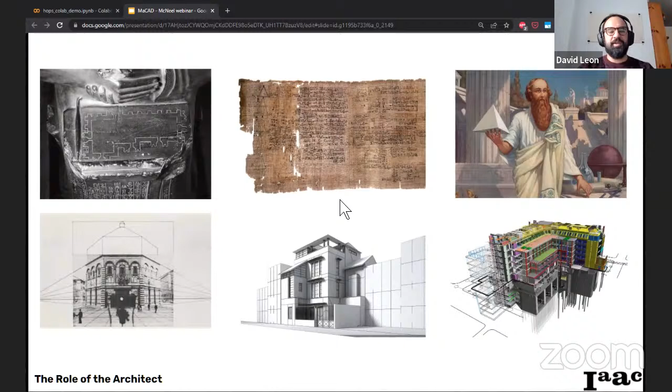This process has become ever more complex since we started building in the first place, and it's tightly related to the tools we've had at hand since the beginning—first with hand drafting, then the incorporation of technical tools to gain more precision in our drawings, to communicate those drawings faster, perhaps establishing certain conventions that architects now sometimes take for granted.

And finally, through the inevitable incorporation of computation in the design process, these tools and facilities have gotten mainstreamed, and it feels from the architectural point of view that it has exploded in many directions, because computation now touches so many aspects of the architectural trade. But setting aside the most common notion of computational design in architecture, which is this picture of complexity in complex forms, transforming our ideas into volumetric complexity.

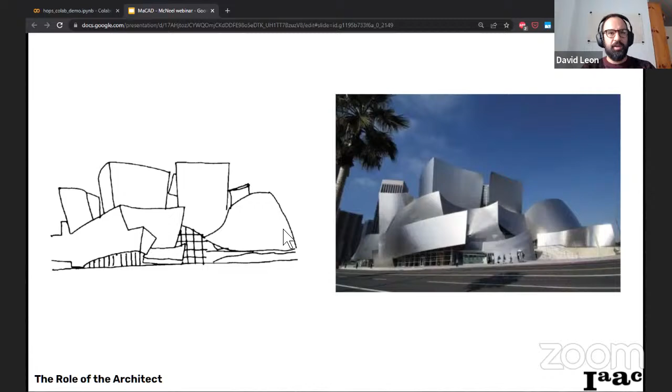I think there lies a more complex, more rich dialogue in the evolution of this process of conveying our ideas between architects, between a team, or between the designer and the final user. Along the lines of time, starting from hand drawing, going through technical drawing, and through the incorporation of computer-aided design by the use of technical drawing on our screens, and more plastic or freeform types of designs, all the way up to what we now call computational design.

What we have gained technically can be described as an enhancement in precision, an enhancement in complexity, or basically allowing us more complexity within our design process. But more than that, I think it's a matter of being able to represent or incorporate in our buildings, in our design, so many different dimensions beyond the 3D dimensions that we know.

That means dimensions like time, dimensions like property, and once we have included these dimensions into the design process, we start to establish a dialogue between what we are used to dealing with as architects and designers in the first place, which is basically geometry and notions of space and spatial quality, and everything that we're currently still being taught in architectural schools.

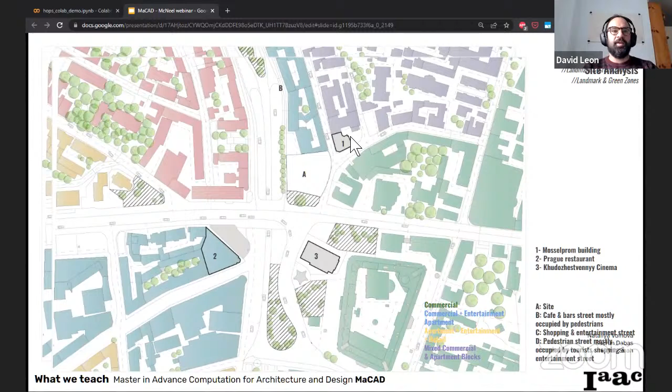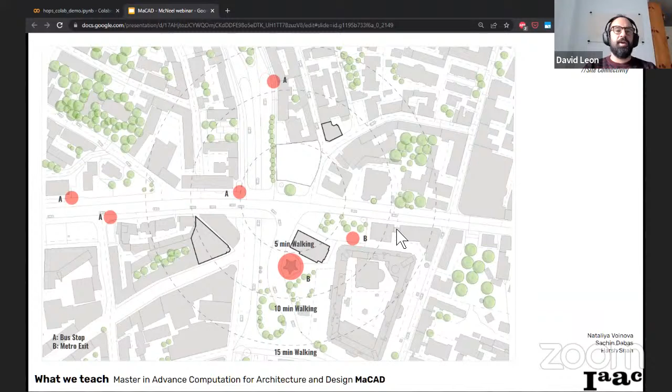This is a project by Nataliya Voinova, Sachin Dabas, and Harsha from the first year of MaCAD, which takes a research approach into an analysis of the city of Moscow, starting by finding the site in which to set out a building, and through a research approach, finding contextual parameters which should inform the building design process.

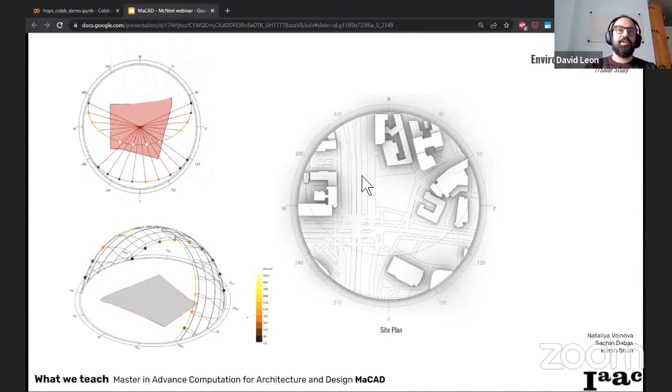There's of course a deep analysis using performance tools such as radiation, radiance, and solar analysis — environmental analysis — but more importantly, there's the response from the parametric building strategies to this analysis in order to find the most suitable option in the end.

As I said, the studio encompasses not only a design strategy, but several methods of conceptual analysis that our students go through in order to have critical thinking about each of the proposals that the computer in the end provides. So different variants through generative optimization or through different methods of form finding are explored.

Finally, the building enters a loop of proposal analysis in which, at the end, the designer has control — has the decision of where to stop or which iteration to finally bake as the final one.

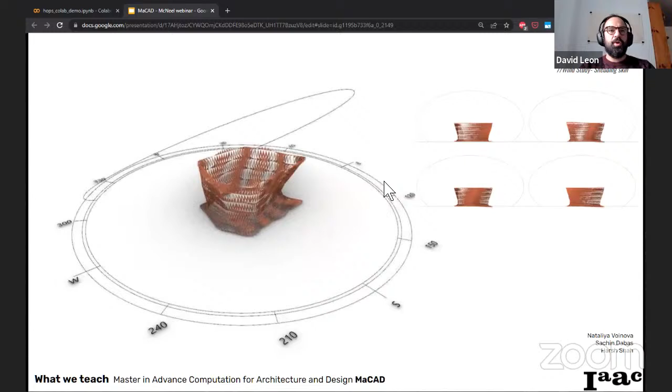This analysis is taken further afterwards through structural optimization as well, varying certain parameters, always with materiality in mind, in order to find the most performative options of structure.

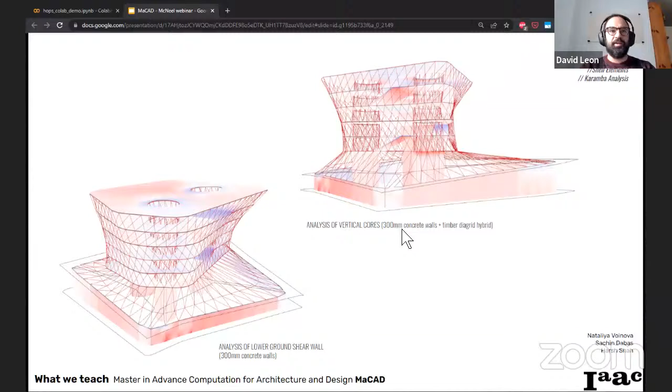In this case, we're talking about the building skin — but how does that also affect the different constituents of the building, in order to result in less or more viable options through the analysis of different parameters recollected from the parametric design process.

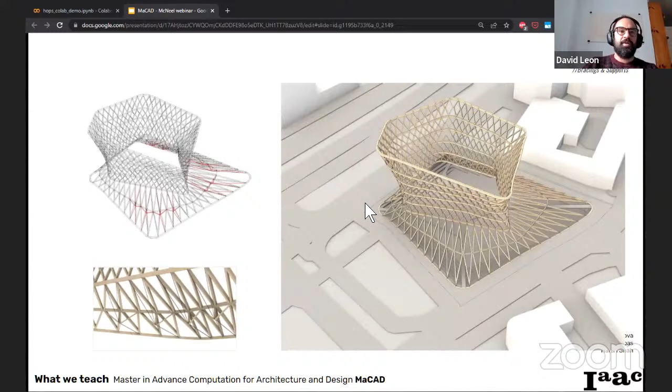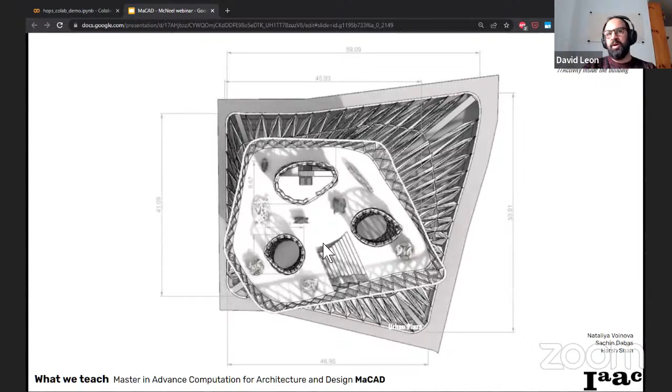And finally, we always aim that our projects become architectural, with architectural features, escaping the conceptual stage as much as possible. Given that all of this for each module is only developed within the scope of 3 months, which is nothing short of amazing, it never ceases to impress me in terms of what the students can achieve in this period of time.

Secondly, moving on to the second module, which addresses the notion of BIM and smart construction. I think it's fair to say that this is not a BIM course — it's not a course in which you would learn Revit or learn how to become a BIM manager, but it is a course in which you would tackle the key aspects of the BIM paradigm nowadays.

Such as interoperability through rhino.inside, for instance in the integrated modeling seminar — in this case, rhino.inside Revit — with the aim of establishing a conversation between a software able to model freely like Rhino and generate complex parametrical designs in Grasshopper, and another software aimed at drafting and documentation, and finally the production of federated models that are becoming more and more standard in AEC practice nowadays.

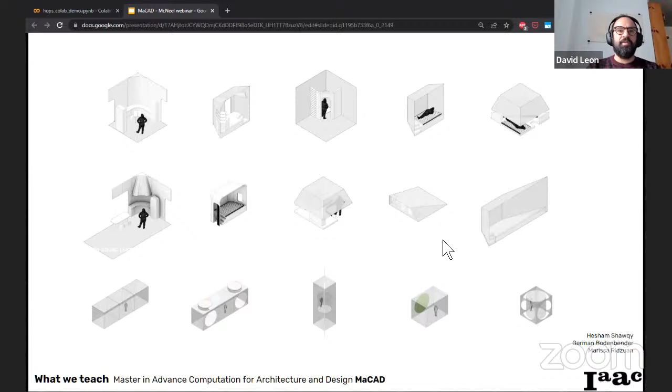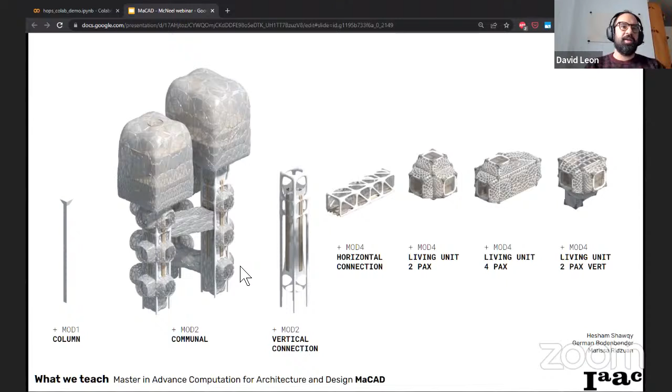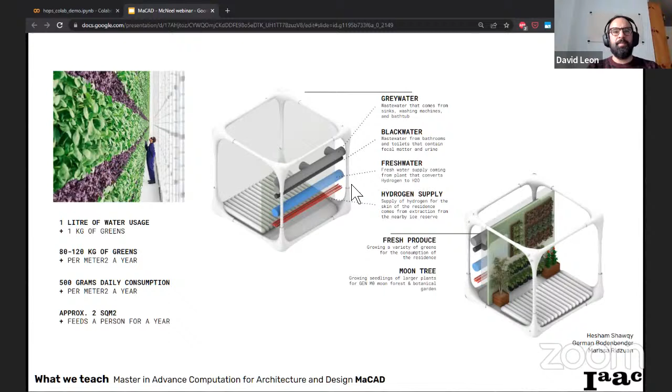But of course, never leaving aside the actual physical and fabricational constraints of what it takes to build on the moon. So in the end, their projects are highly involved, not only in terms of design, but of course in detailing these design modules on the moon, and in the exploration of different iterations of the design process, always with the goal

of achieving a certain performance goal in mind. In this case, you can see the phase of construction on the moon was also taken into account, so it became quite a realistic project.

And here, a bit of the computational workflow that is established for one such project like the one you're seeing here. So there's a stochastic aggregation by WASP, a structural analysis verification by Karamba, and basically intercollaboration, export, and interoperability to rhino.inside and Speckle.

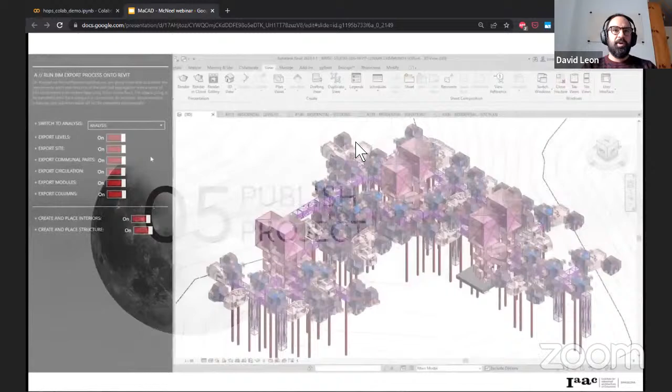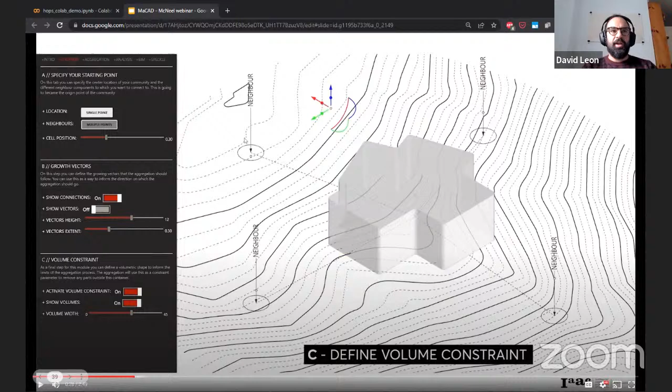So mainly in the end, our students push these projects also as configurators in the web, where you can see here—let me put this a bit faster—more or less in a nutshell, how they allow users to explore different variations of the project by running grasshopper definitions in a website.

And not only that, but also the structural and analysis of walkability, for example, finding shortest path, or structural verifications of each of the projects, then actually exporting all of the different options for analysis into a spreadsheet, always creating amazing visualizations that are helpful to inform the architect and the user about the different options that we have at hand.

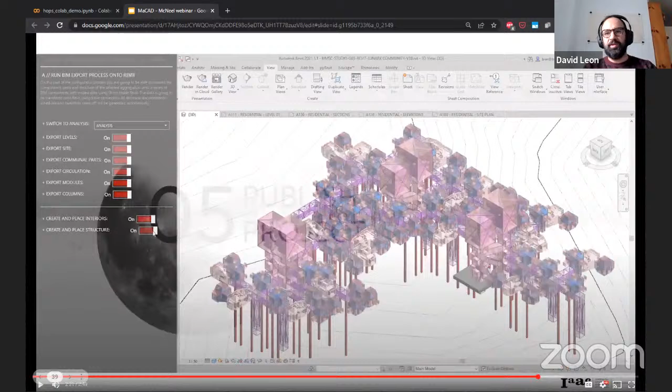And finally, taking this further to Revit also, through Speckle for collaboration, for intercollaboration. This in the end results in a set of plans produced in Revit that are specifications for the project,

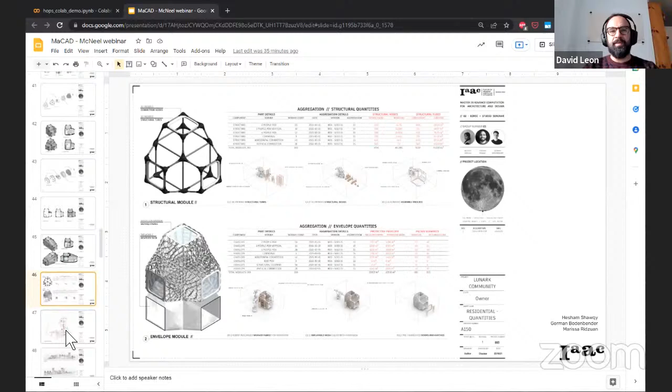as this would actually be an actual fabrication project. Such specifications actually contain these properties and data that we've been talking about, the different dimensions of the project that these geometries contain in schedules and tables that are, I would say, impressive for the fact of being stamped as a sci-fi project in the first place.

This is actually taken to reality. Then you see configurations of the project, and of course, always a really nice visualization of the project itself.

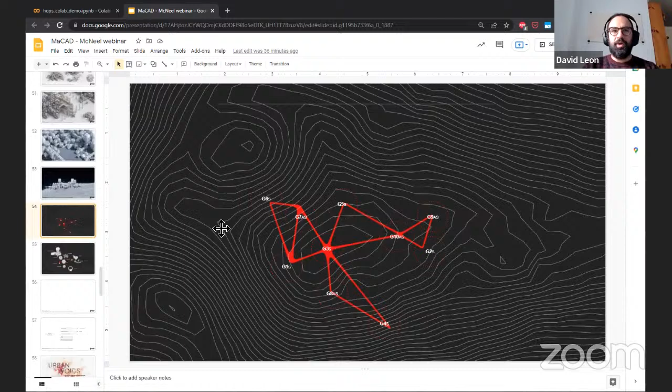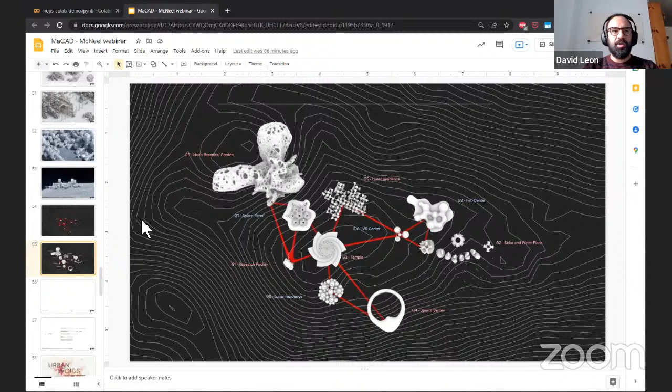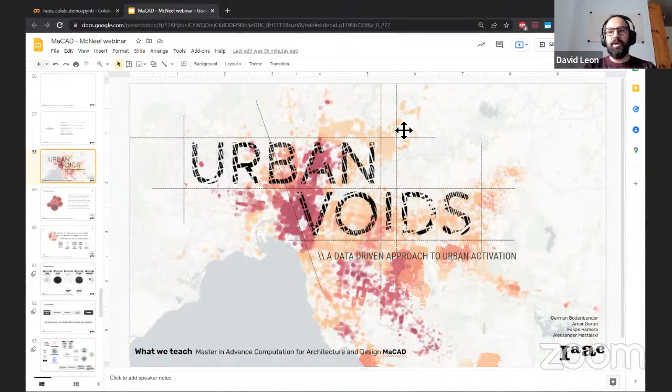For the sake of explaining this other project, also by Germán, but in this case with Amar, Felipe, and Aleksander, which is called Urban Voids. This project is part of the Artificial Intelligence in Architecture module, which basically tackles issues of data encoding, generative planning, and geometrical optimization. I think it's going to exemplify all of the aspects that the module tackles, and basically aims to provide a data-driven approach to analyze the hidden opportunities behind the urban fabric.

So our students set out to collect and clean a database, which often they produce through Python libraries like NetworkX, find different scores within topological optimization techniques such as shortest paths and so on, and then analyze through machine learning, in this case k-means clustering techniques, how they can actually make sense of this data and cluster different features of the projects that are not only the two-dimensional aspects that you see in the map.

So in the end, all of this is brought to the web as an app that I was showing at the end of the presentation. And of course, it's an interactive app where the user can actually navigate and see the proposal. So according to Grasshopper and Urbano, this is the data that's collected in a more flat scenario. So the project poses the question of how can we actually make the process more efficient and reliable.

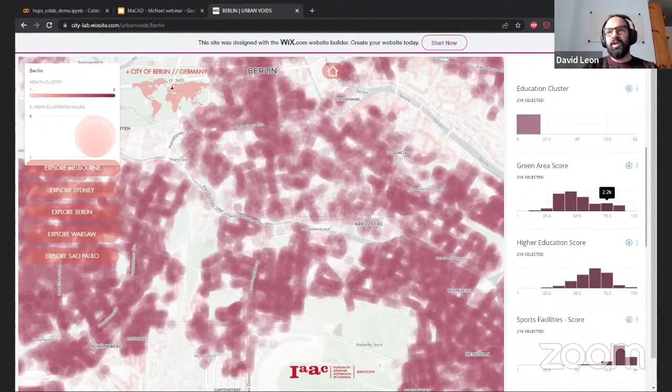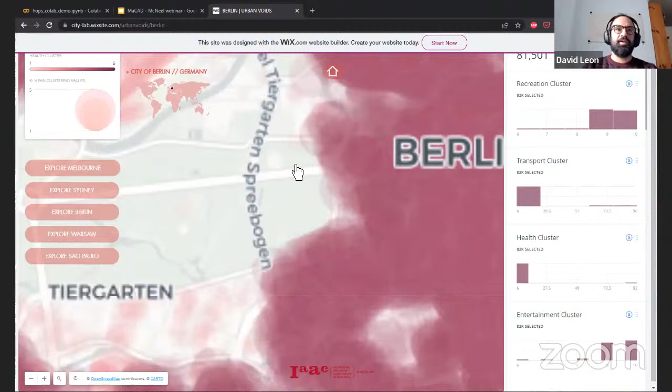But more importantly, you can point these tools to different map scenarios in which you can actually see the result, the clustering of the area selected, and how through different aspects that are analyzed, you can get a quantifiable collection of how that area would perform in these different features being analyzed. This is all being displayed live.

I guess we could point this information to many other places, but just to show, these guys have created a brilliant application which you can not only explore but actually use if you're in such a place.

I'm a bit sorry that I had to run through this last part, but I'll tell you much more about this, and there's a lot more information about what we do in our seminars on our MaCAD site. Our applications are always open, so if you're more interested about these tools, these seminars, or possibly joining our masters, you can go to the site and explore a lot of what's been going on with different articles and publications that the students have been involved with.

I wanted to leave a little bit of time for the technical side also, to show you a tiny bit of what our students are usually involved with, in this case bringing a widely known platform for artificial intelligence and collaboration like Google Colab into Rhino through Hops, which is basically our vessel in the whole masters to bring all sorts of computation from different places into Rhino, into Grasshopper, into familiar territory for our students.